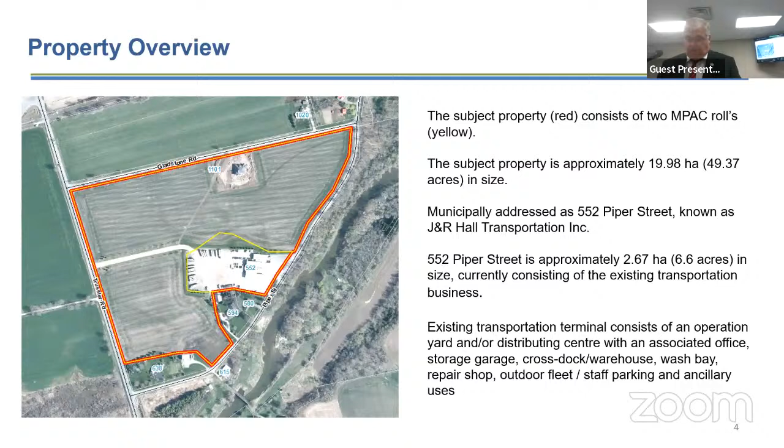The property itself is currently zoned agriculture, specific to the area known as Part 2. So largely that yellow area that we had on the prior slide, extending through the access driveway to Trussler Road, because all trucks enter and exit via the Trussler Road entrance. There is an exemption 20.1.8 Part 2, and within this area, being the 6.6 acre area, the transportation terminal is identified as a permitted use.

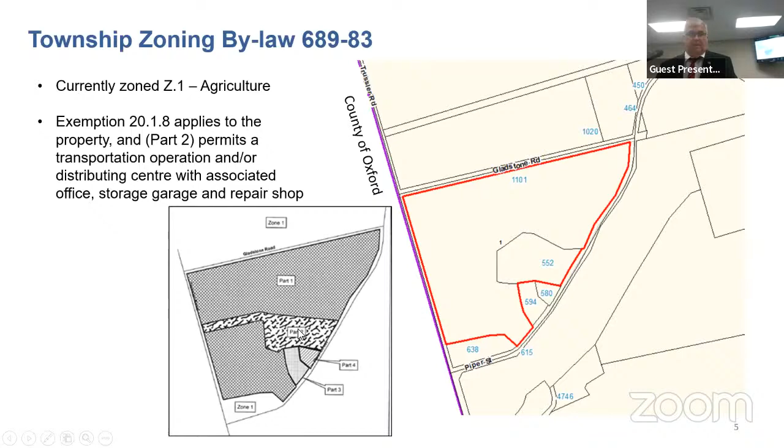The amendment is required because under the current provisions of exemption 20.1.8, it states that no additions, extensions, enlargements, or new buildings shall be permitted. So to accommodate the warehouse expansion and the new wash facility requires that permission to be amended. In addition, the overall maximum area of all buildings on the property has to be adjusted accordingly to accommodate the additional buildings' square footage.

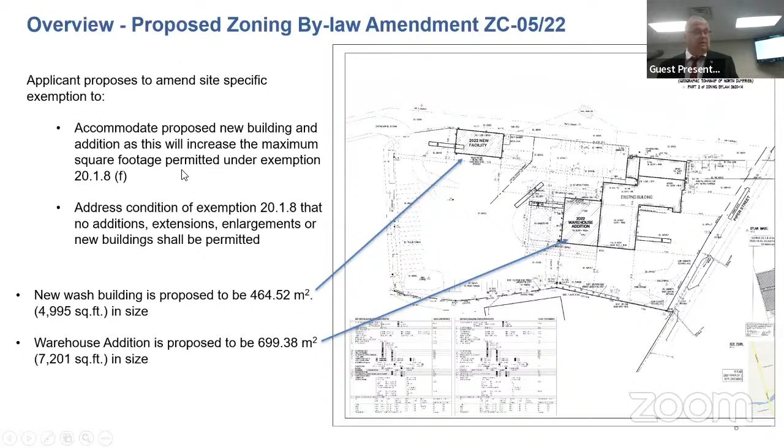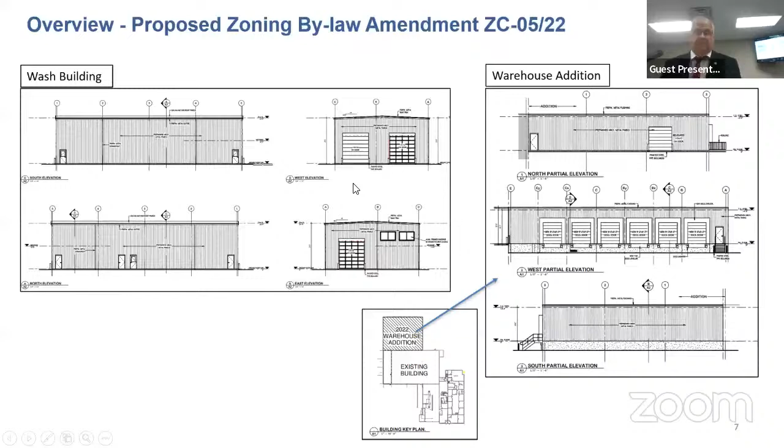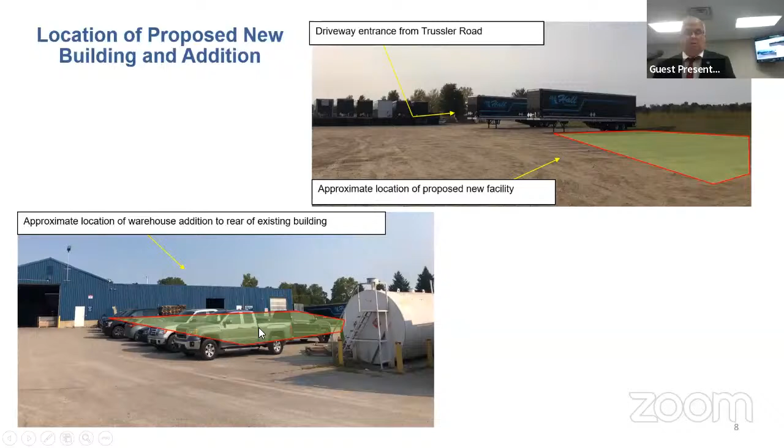Context in terms of provincial planning policies and associated regulations, referencing specifically the provincial policy statement. Basically, we are directed and encouraged to promote a diversification of the economic base and employment opportunities under Places to Grow for the Greater Golden Horseshoe.

Typically, development is not allowed outside the settlement areas. However, expansions to existing building structures and accessory uses are permitted. So there's a long-standing presence of this operation at this address, and we're facilitating an expansion consistent with section 4231E of the Greater Golden Horseshoe Plan.

Looking at the township and the regional official plan, the property in both documents is designated prime agricultural. There is a small portion of the township official plan lands that is captured as hazard lands, associated with the edge of the Nith River system along the Piper Street frontage. However, it is not within the development parcel that's before council tonight.

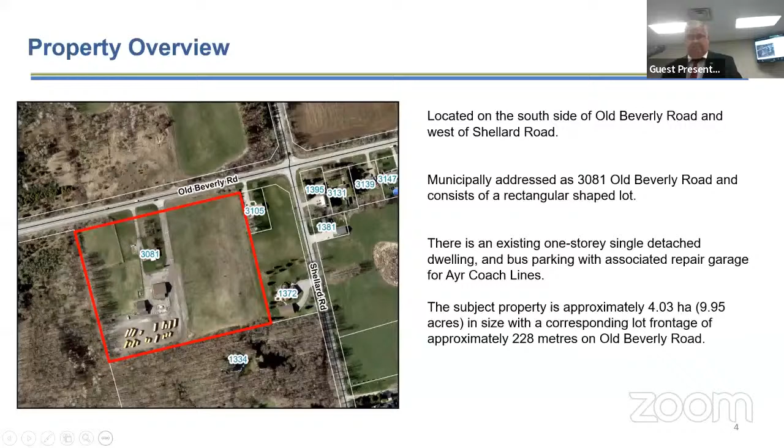At present, the property itself is zoned Z1 agriculture, and as noted previously, there is a site-specific exemption specific to this property, exemption 20.1.34. It applies to the property in its entirety, all 9+ acres, and it permits the school bus garage, including storage, repair, and maintenance of the school buses.

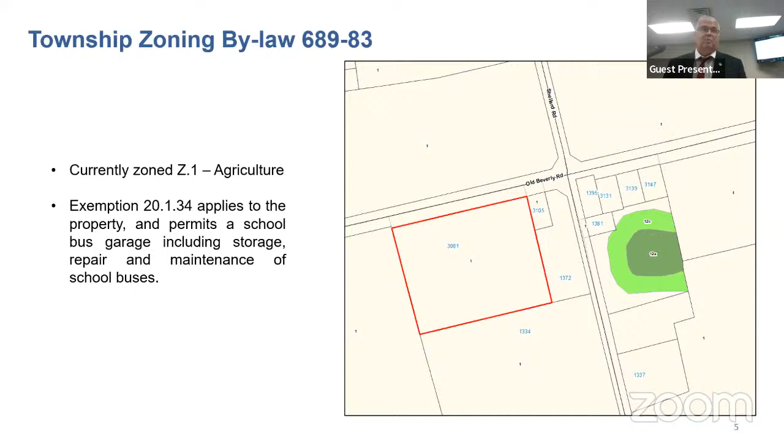The applicant has filed the zoning application to permit two specific changes to the site-specific exemption provisions. One is to facilitate expansions to the existing buildings to create more square footage to allow for the proper storage and repair of a fleet of buses, and to also allow, as an additional use, the ability to maintain coach buses. So the intent is to remove the word school buses and just refer to it as buses.

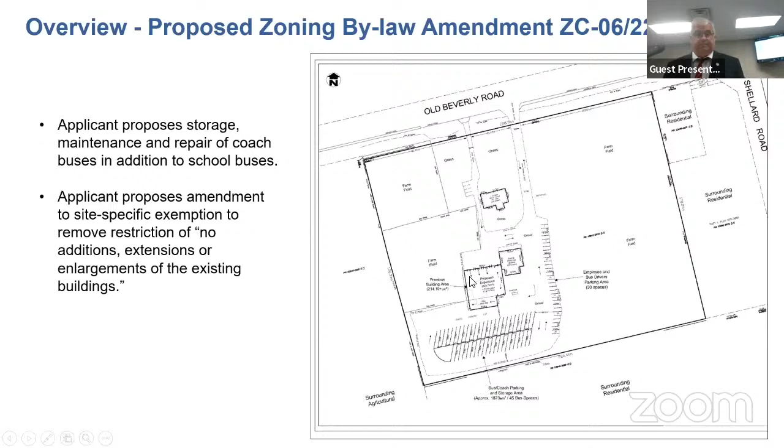We are looking at the Eastern building, where there being two, is approximately 3,200 square feet in size. The existing Western building is approximately 2,300 square feet in size and would be, through the enlargement or addition, increased to approximately 8,890 square feet.

The proposed building expansion would include 4 maintenance bays as well as a closed wash bay. The proponent contemplates the equivalent of 45 buses being parked on the property and 30 stalls for employee or bus driver parking.

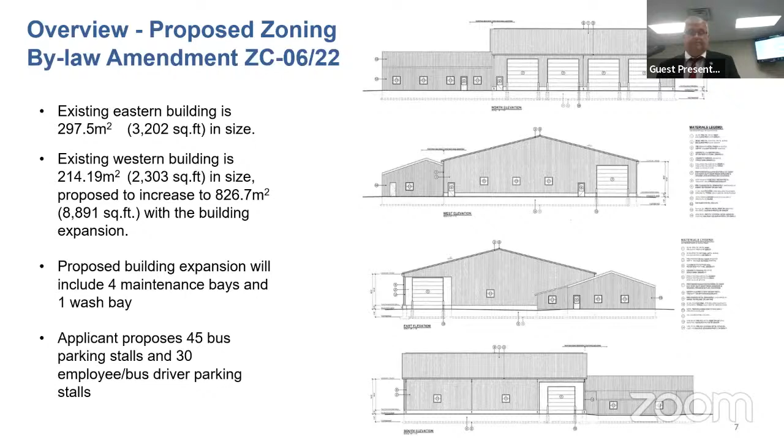So as you can see, at present, we have an active operating site but narrowly used for the purposes of parking, storage, and repair of school buses.

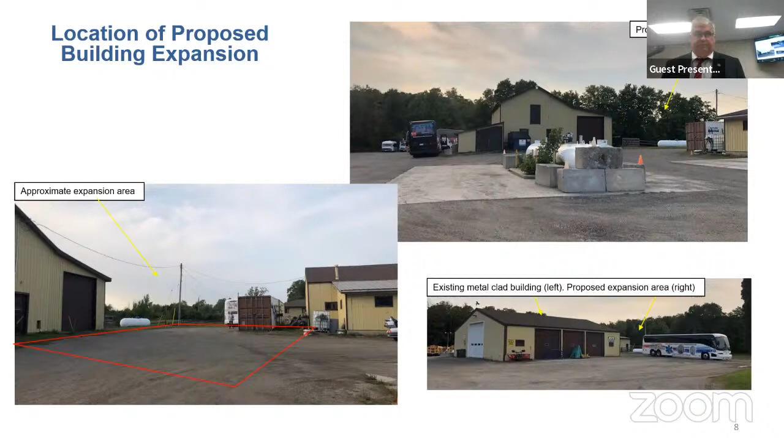Referring to various provincial planning policies and regulations, we start with the provincial policy statement. What we're looking at once again is the diversification of the economic base of opportunities. Under the Places to Grow growth plan for the Greater Golden Horseshoe area, development is not generally permitted outside of designated settlement areas. However, we are allowed to support existing businesses and the expansions, redevelopment of those historic existing business enterprises.

The regional official plan identifies that portions of the property are designated core environmental features. The balance of the property is designated rural and protected countryside. In the township's official plan, consistent with the regional document, it carries an agricultural designation, and once again, environmentally sensitive features on a portion of the property. That is why the environmental impact study was undertaken, to confirm that the proposed redevelopment of the site would not negatively affect or impact those adjacent environmentally sensitive features.

There's been a piece of correspondence received from an adjacent resident located at 1372 Shellard, who has no concerns with the proposed application. With respect to agency correspondence, there's been no objections from the region, Grand River Conservation Authority, Enbridge Gas, 2 school boards, or Grand Bridge Energy.

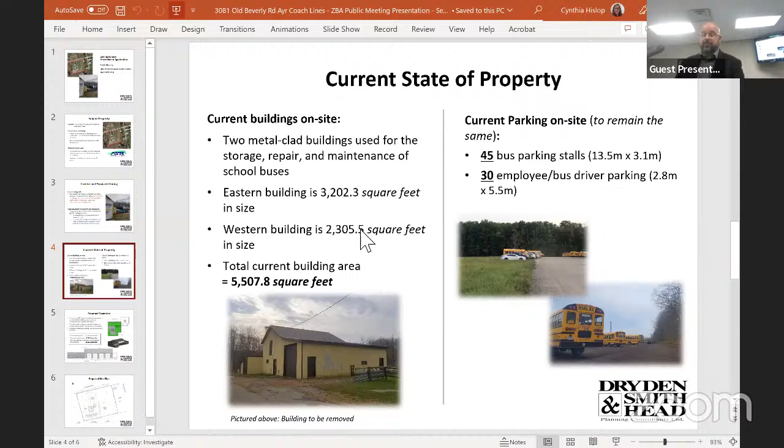The traffic impact study notes there will be little to no impact on Beverly Road. The GRCA has no concerns and is satisfied there will be no negative impact to the surrounding environmental area. With the proposed reconstruction, the site will be better equipped to handle stormwater management and safely capture any oil and grit from the updated drainage system. This proposal is in keeping with the PPS, Places to Grow, the regional official plan, and the township official plan. We trust you will recognize this is a minor zoning amendment that will allow Ayr Coach Lines to continue serving our community with the school system and general public bus service. If you have any questions, I'd be happy to answer them.

Thank you. Is there anyone from the public who wishes to speak on this issue? Councillors, any questions? Seeing none, can I have the motion, please?

Moved by myself and seconded by Councillor McCurry that PD report number 37-2022 be received, and that all comments and correspondence received through the public meeting and associated consultation process be returned to staff for consideration in a future report to council on the disposition of this matter. Thank you. All those in favor? Carried.

Next is item 8.3, report number PB-38-2022, proposed zoning bylaw amendments for 1589 Roseville Road, file number ZC-07/22. Notice has been given to those in accordance with the Planning Act. The clerk will record everyone who has commented on this application, attended, and or registered with the clerk's division to attend the meeting this evening. These individuals will be notified of the decision or the convening of future meetings. I'd now like to introduce Andrew McNeely, CAO, who will be presenting this application. Andrew, please.

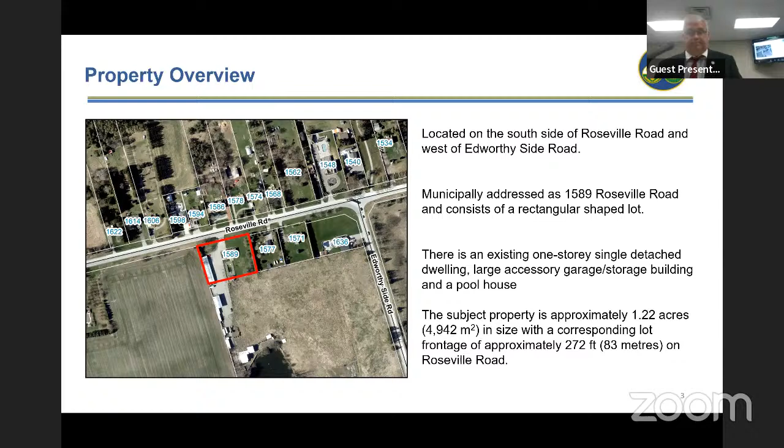The property is presently zoned rural residential Z3, which is consistent with the majority of the homes that frame both the north and south side of Roseville Road in the Dickie Settlement 2 community.

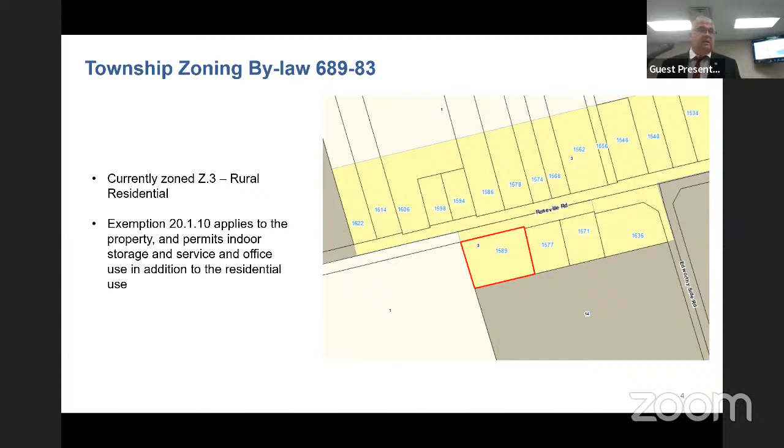Exemption 20.1.10, which applies exclusively to the subject lands before council this evening, permits indoor storage and service and office use in addition to the residential use. So those commercial type activities are largely within the context of the accessory building that frames the west side of the property, and of course the continuation of the residential use in the existing residence.

This just sort of gives you the scheme of the property. So this is Roseville Road to the north, the existing residence. The access driveway would be approximately across the midpoint of the frontage. This is the accessory building along the west property line, note its proximity to the side lot line. There's a pool house that exists literally on the property line at the south limit, and then there's a pool in this location that the pool house supports.

So the intent of the proposed amendment is to do a few things. Remove the commercial related land use activities so that it truly is our Z3 residential type use on the property. The existing accessory buildings would continue to be in place. However, they would now be ancillary to the permitted residential use.

We are recognizing, given the size of the property and the corresponding footprint of the existing accessory buildings, increasing the permissions applicable to this zone classification to allow the accessory buildings to occupy the equivalent of 7.7% of the lot, where the generic zone standards only allow 4% coverage. There would be a 0 lot line where the pool house is situated along the south lot line.

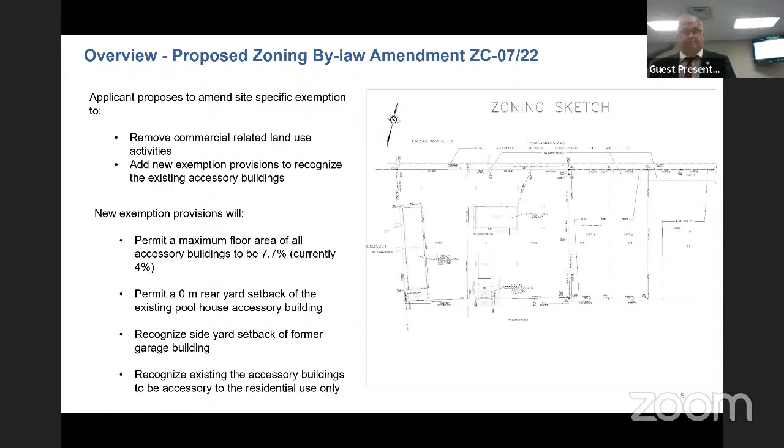So these two photos show this is the existing accessory building that's situated along the west lot line. You'll see the fence at the south lot line. The building to the south of that fence is on an adjacent property that once upon a long time ago was part of this land. So the wood fence separates notionally the boundaries between the two parcels.

This is the pool house. You can see the edge of the perimeter fencing that would surround the pool enclosure. This existing pool house is situated right on the 0 lot line between the existing residence and the adjacent property.

Referring to provincial policies and regulations, basically we're looking at development within a settlement area, but as I indicated, this is generally speaking administrative in nature, so we're just looking at the efficient use of land and resources. As it relates specifically to the growth plan for the greater Golden Horseshoe area, once again, development would be within settlement areas, settlement 2 area, and we're looking at the scale and intent of development reflective of the nature of the hierarchy of the settlement area. This use, as proposed, is consistent with what we would expect in a rural settlement.